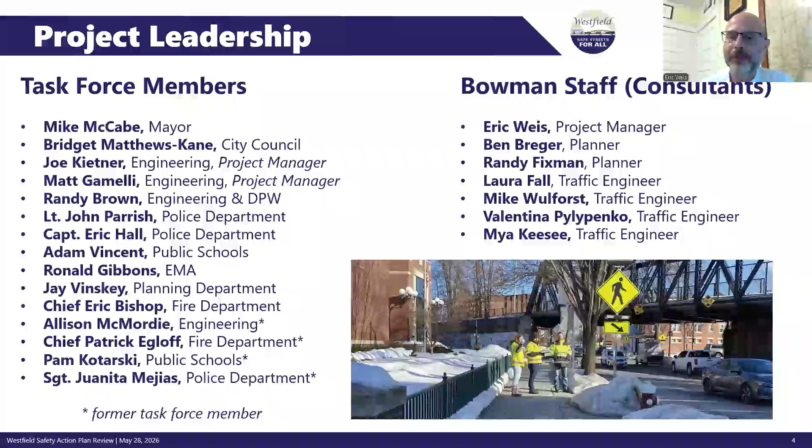And of course, we'd also like to thank everybody who's been involved with this project in any way since the beginning over a year ago, whether you chatted with us at an event where we were tabling, or you took a survey, or you sent in some questions by email. All of those contributions help to inform the development of this plan. So thank you very much. Next, please.

This project was funded by the United States Department of Transportation through a program called Safe Streets and Roads for All. We shorten it to Safe Streets for All. The intent of the Safe Streets for All program is to give municipalities and regional agencies the tools they need to reduce and ultimately eliminate serious injuries and fatalities on our roadways. A couple of years ago, the City of Westfield applied for a grant to fund this project, and the city was successful, which is why we're all here today.

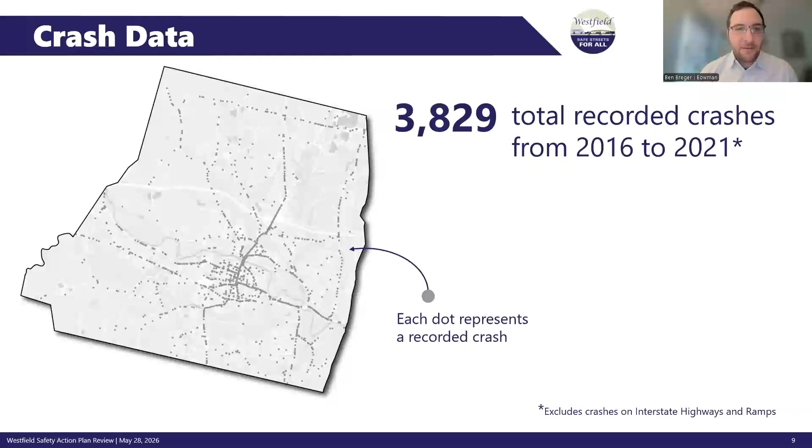So there were 3,829 crashes during that 6-year window, and you can see them spatially on the map here. If you go to the next slide. So we looked at crashes as they relate to crash volumes, crash severity, and then I want to highlight 2 acronyms that you'll see throughout here: fatal and serious injury crashes, FSI crashes. And we looked at crash trends by month and year, and then we looked at vulnerable road user crashes.

Vulnerable road users are folks walking or cycling and are more susceptible to serious injury crashes. So that's why we focus on the FSI crashes and the VRU crashes. If you go to the next slide.

And then if you go to the next slide, we'll see the slice of crashes that resulted in a serious injury requiring hospitalization or a fatality. So in the 6-year window we looked at, 2.5% of crashes had a serious injury or fatality. So that amounted to 81 serious injury crashes and 13 fatal crashes.

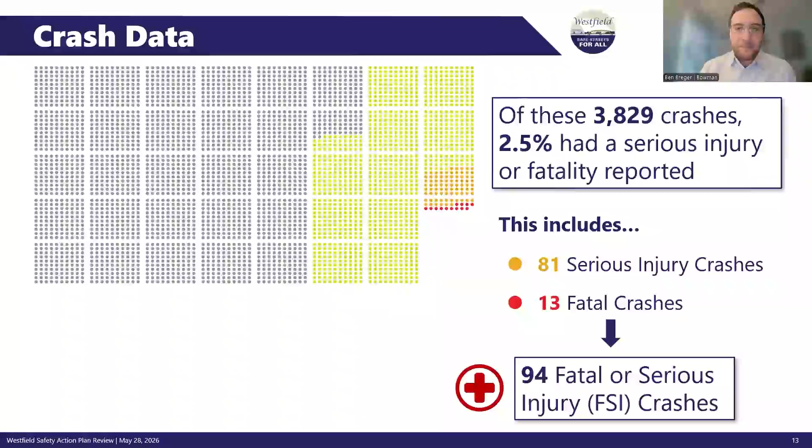And if you go to the next slide, so that's an average of 16 FSI crashes per year, or about 1 every 3 weeks. And the goal of this project, part of the Safe Streets for All project, is formulating a Vision Zero goal. So that's the goal of reducing and eventually eliminating all FSI crashes. So that's the overarching goal of the plan, which we'll touch on further.

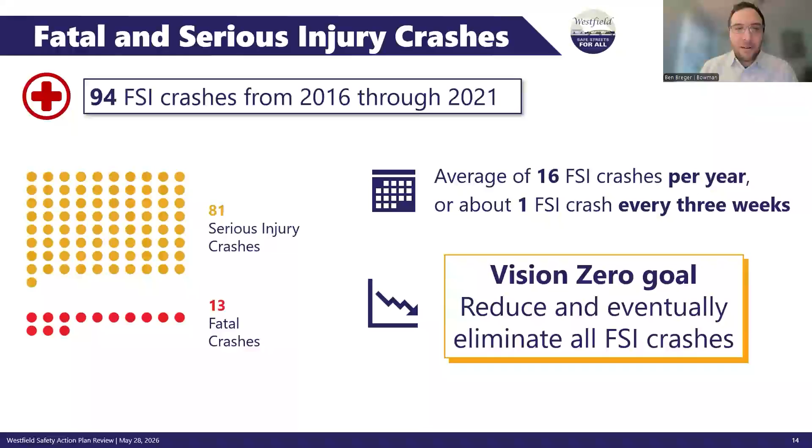So here you kind of see the trends. Throughout the 6-year window we looked at, they're relatively stable in terms of trends. Unfortunately, a few fatal injury crashes per year and 14, 10, 15 or so serious injury crashes per year. Go to the next slide.

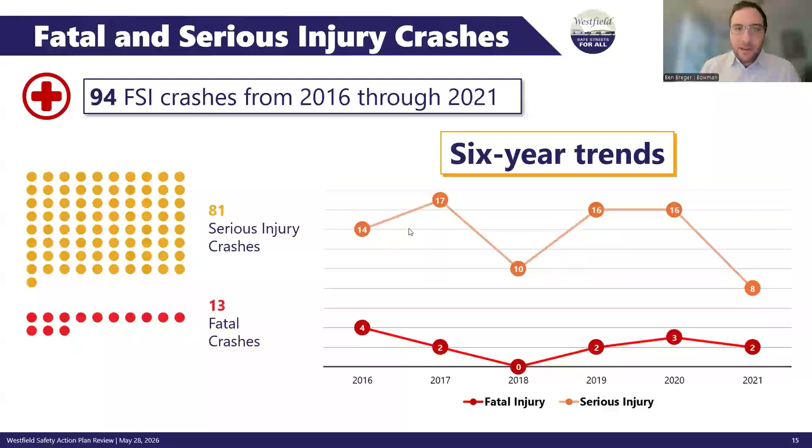So now we're just going to look at some of the results spatially through the city. So this heat map is showing all 3,829 crashes. The yellow and reddish yellow areas are where the hot spots are, and the light red and blue areas are where it's more sparse. So it's probably not surprising. The spatial distribution focused on downtown and the main corridors in Westfield along Route 20 and Route 10 and in the downtown area.

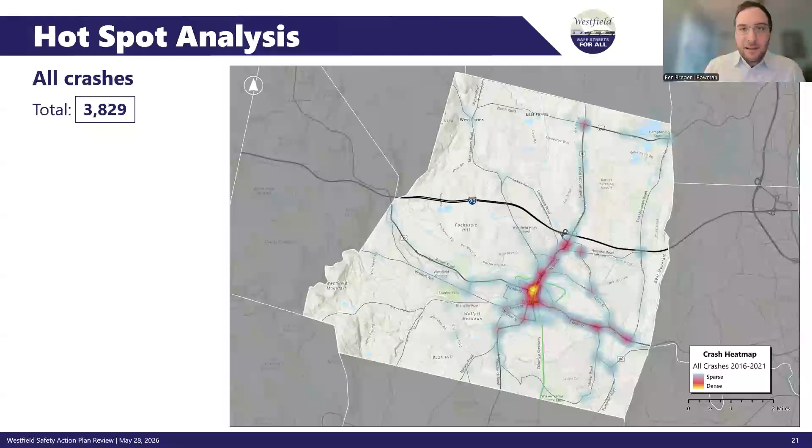So then the next slide shows the fatal and serious injury crashes, so these are a bit more scattered throughout the city. There's also fewer of them, so I think just one or two crashes would result in a dot or splotch there. But you still see the spatial distribution downtown and along Route 20 and in those areas.

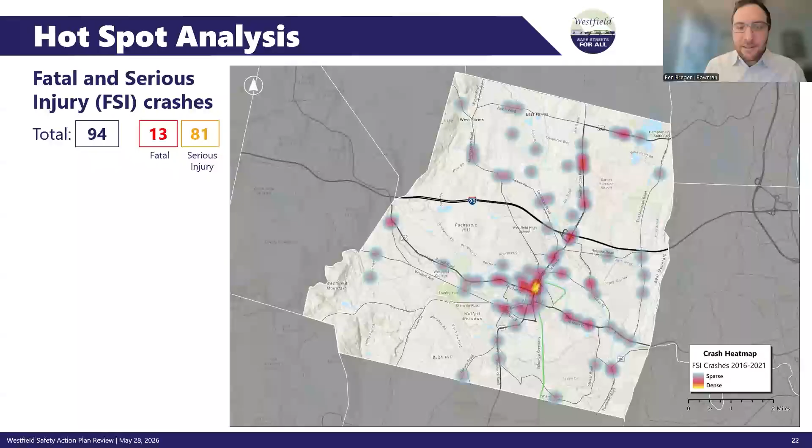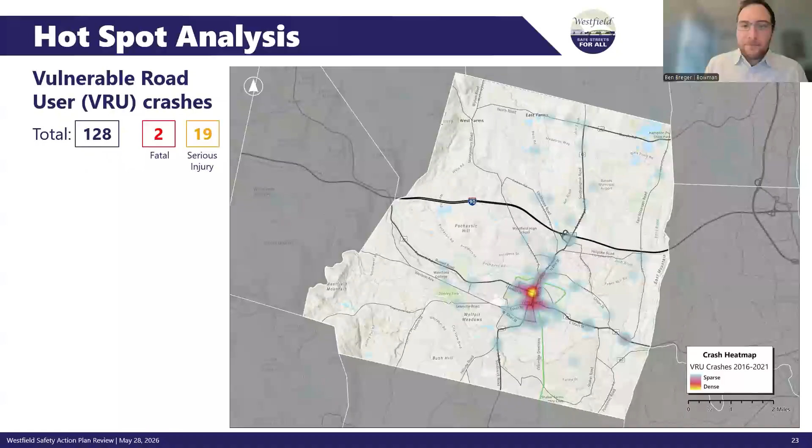Great. All right, so now I'm going to pass on to Eric to talk about public engagement and the efforts we've done. Terrific. Thank you, Ben, for that summary. And Joe, if we can go to the next slide.

So this part of our presentation is all about the public engagement that was carried out as part of this project over the last 12 or 13 months. The data analysis that Ben just walked us through gives us a really good start on where we should focus our attention. But public engagement, which is talking with people at events and at meetings and having conversations with stakeholders and conversations with our task force members, this has been really critical for informing where we're going to make recommendations and what's the nature of those recommendations.

So, for instance, we see 3 events where we tabled in 2025, the Mayor's Bike Ride, Westfield 5K, and at the Senior Center for, I believe it was called Senior Options Day. Next, please. And we had 2 evenings of an open house about the project at the Athenaeum last August. Talked with a lot of folks and gathered a lot of feedback.

Next, please. So here's a couple examples of exercises that people could participate in to help tell us, the team, what their concerns are. So on the right, you see a map. We asked people to jot down their concerns, color-coded by topic on different Post-its, and then pin them to the map for the location they're talking about. That photo on the left is asking folks to indicate what sort of strategies they prefer for public safety.

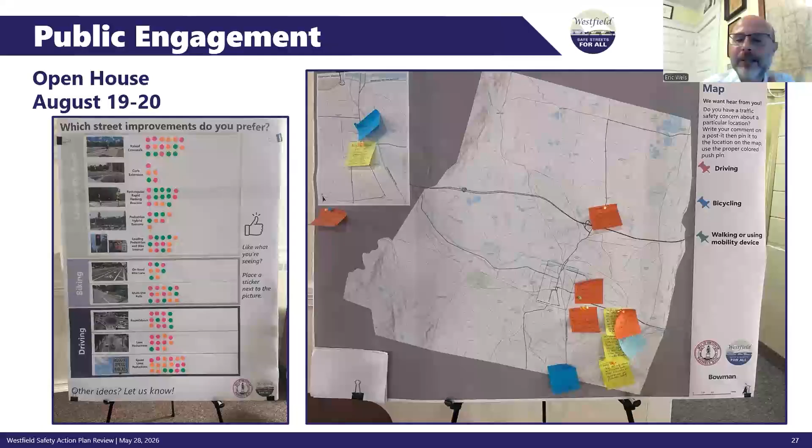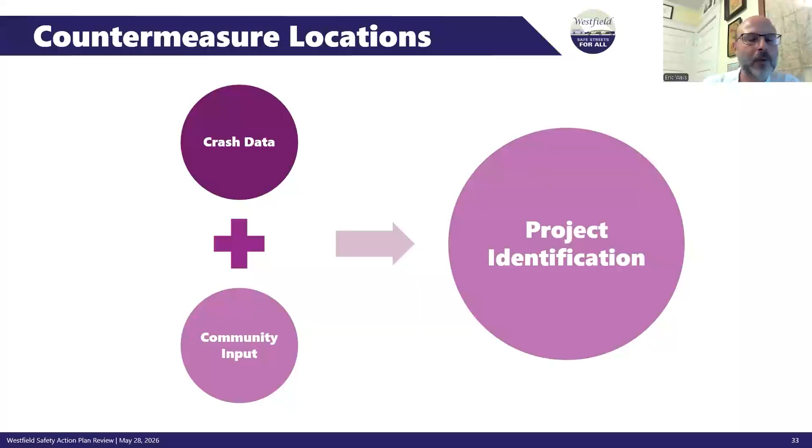So having completed the data analysis that Ben talked about, and having analyzed all of the public engagement information that we got, we were then able to combine the two to move into the next and probably most exciting piece of the project, which is project identification. And for that, Ben will walk us through the next slides. All right, awesome. Thanks, Eric. So yeah, if you go to the next slide, I'll start.

I'm going to start at a higher level, kind of like the citywide top safety issues, and then narrow into the more specific projects and concept plans. So one of our first exercises was basically take the trove of public feedback we got from community members and residents and the crash data that we looked at and kind of begin to synthesize what are the top safety issues that Westfield is dealing with.

And some of these are unique to Westfield, some of these are just kind of common safety issues across communities, but I think these ones are rooted in the feedback we received and what the crash data was telling us. So basically we did this exercise to categorize each of the public comments, applying different tags to them, and then found what categories or emphasis areas, what kind of buckets they fit into. And we developed these four safety issues.

So the top one would be excessive vehicle speeding. The second one is unsafe and low visibility pedestrian crossings. Third is driver confusion and intersection geometry. So basically, confusion around how you're supposed to navigate certain intersections, such as the roundabout downtown in Park Square, and then sidewalk, ADA, and bicycle network gaps.

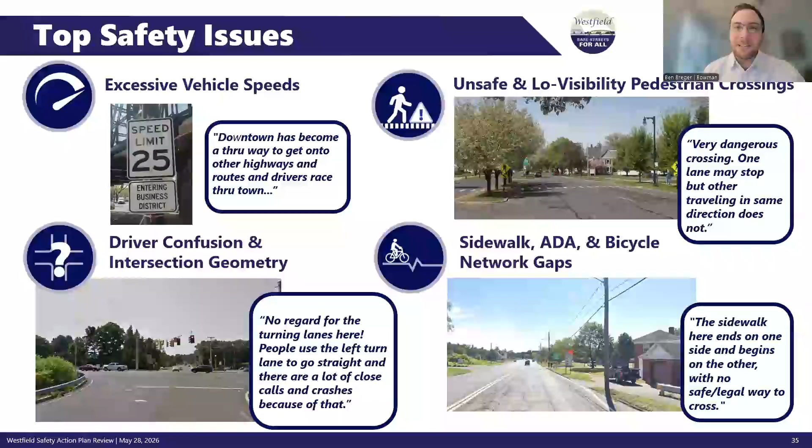And so if you go to the next slide, we provide just a snapshot of the citywide actions, because I didn't want to lay out every single one as it's written in the plan. But essentially for each top safety issue, we developed with the city some aspirational goals, just some principles to look into. So for excessive vehicle speeds, using street design to slow traffic and promote safer speeds, reinforcing speed limits through design, education, and enforcement, and then focusing on schools, walking routes, and high crash areas. So that would be examples of citywide actions for vehicle speeds.

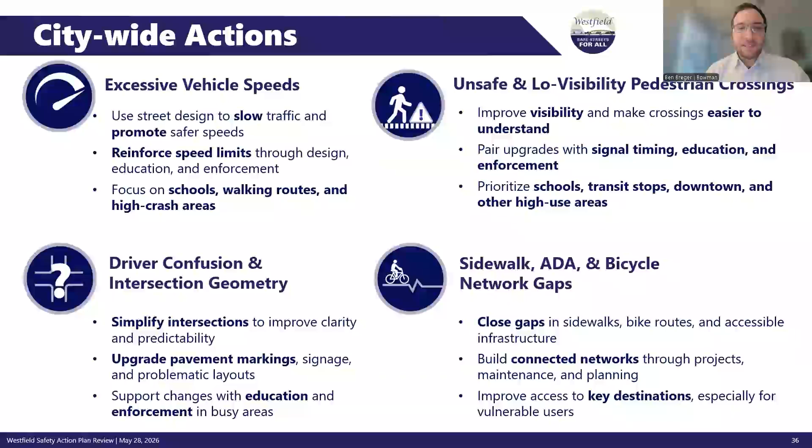For low visibility and unsafe pedestrian crossings, just improving visibility and making crossings easier to understand. That could take the form of lighting improvements, or trimming vegetation around crosswalks, or restricting parking up against crosswalks, which is often an issue, just to make people more visible, or doing crosswalk bump outs, raised crosswalks, those types of things. And so, yeah, for each top safety issue, we developed a list of citywide actions that the city can focus on as they're repaving roads or going through design and engineering processes. If you go to the next slide, Joe.

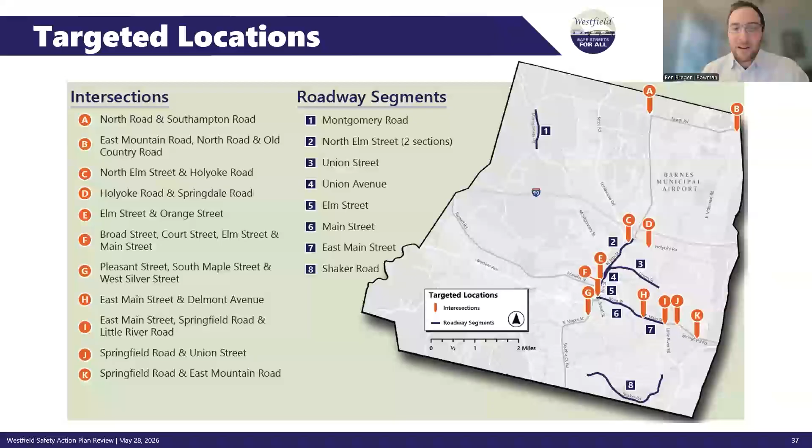So that covers the citywide actions, but then working again with the crash data and the input we heard from community members, we identified the top 20 locations in the city, and this is a mix of intersections and roadway segments. You might count that there's only 19 on the map here, but there are two sections of North Elm Street that we looked at. And so you'll see again, as we mentioned in the crash data, it's focused in the downtown area, but also along East Main Street, North Elm Street. And then we also cover intersections and roadways in the northern part of the city, and also on Shaker Road, where we heard a lot of community feedback about issues on some of the curves. So we can go to the next slide.

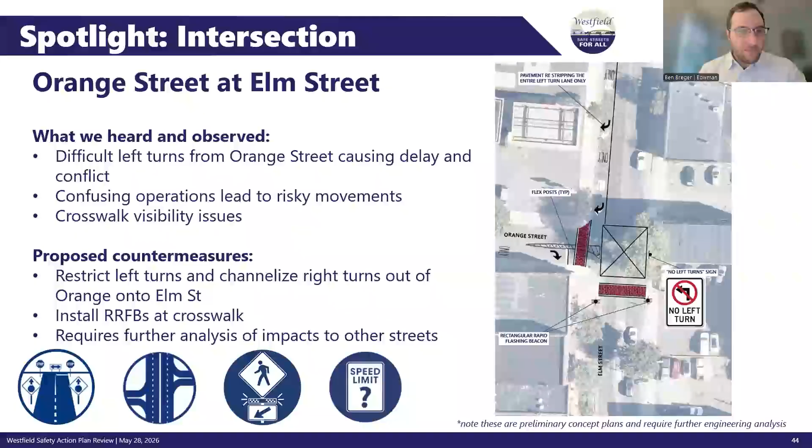So this idea, shown on the screen here on the right, would be to restrict left turns through the use of a flex post, for example, could be one idea. And so you force folks to take a right on Elm Street to go south. Because if you take away that left turn movement, it simplifies and reduces conflict points. And then adding the rectangular rapid flashing beacons to the crosswalk here. And so, yeah, that's the recommendation for Orange at Elm Street.

And then the next location is for North Elm Street, the northern segment of North Elm Street as you're headed up to Southampton. So the first location is at the intersection with Holyoke Road. We observed safety concerns and heard safety concerns at the crosswalk here, because cars are going very fast, and they almost treat this like an off-ramp to go onto Holyoke Road. So we are proposing to do a raised crosswalk, flashing beacons, yield signs, and just basically calling attention to this crosswalk here for this location.

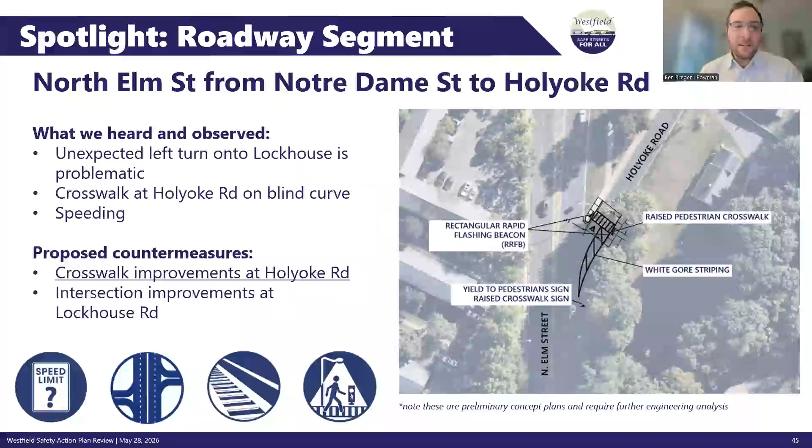And then the next segment, if you go to the next slide, is further south on North Elm Street at Lockhouse Road, where that left turn movement onto Lockhouse Road certainly causes congestion when cars are queuing there to turn left, but then also safety concerns, especially rear end crashes we saw a lot of in the data. We couldn't make a full left turn lane. However, adding the shared through and left pavement markings indicates to folks early on that there is a left turn, and that folks are going to be making left turns from that lane.

Adding an intersection control beacon that's overhead of the intersection with a yellow flashing light just to call attention to the intersection and the possibility of stopped cars in that location. And then, not that there are many left turns from Lockhouse onto North Elm Street, but making this a mountable right out only channelization would help reduce those conflicts as well.

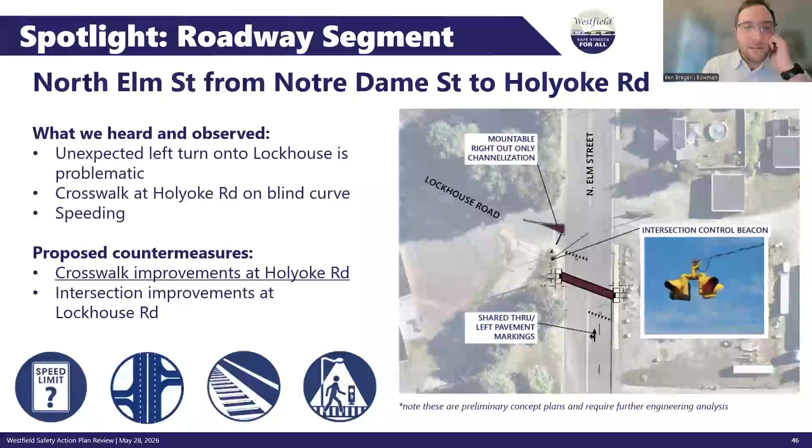So if you go to the next slide, Joe. So yeah, that kind of concludes our high level overview of the project identification. I'd encourage folks to look at the action plan in more detail for more information. So thank you, and I'll pass it on to Eric, who is going to go into our policy section.

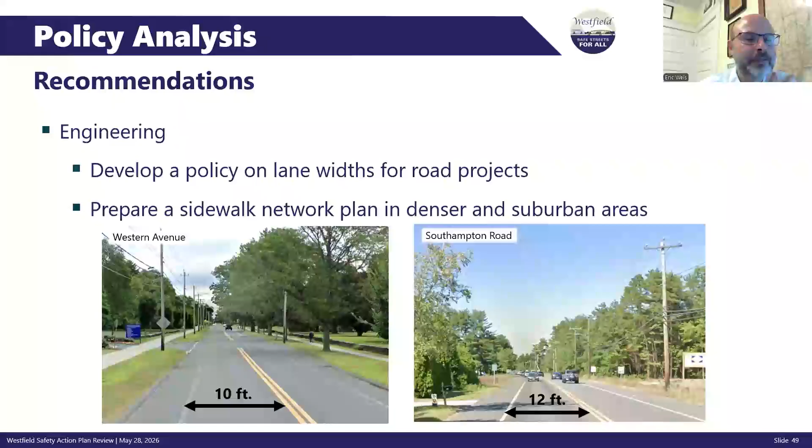We think it would be a good idea to incorporate such a review to see if it's appropriate to narrow lanes on certain streets. This brings speeds down, which results in a safer street. We're also recommending that a sidewalk network plan be created. Next, please.

Related to public safety, we are recommending that the police department take a closer look at the size of fines that are related to roadway safety. So for instance, if you're ticketed for parking on a sidewalk or in a crosswalk, the fine is something like $15 to $25. And that may not be much of a deterrent to stop people from parking on a sidewalk or on a crosswalk. So we're recommending that a review be done to see if it's time to raise those fines.

And as part of that, a progressive ticketing campaign could be enacted. What this means is it's a three-step process. The first step being education and outreach to city residents, letting them know that greater enforcement is going to start. Part two is starting with the tickets, but they're just warnings for a while, getting people used to it. And finally, the third step is actual issuing of fines.

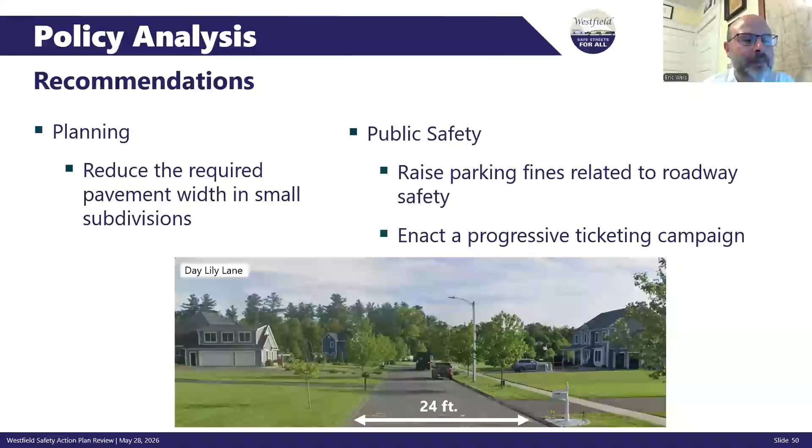So I did mention that there are a number of required elements to a completed safety action plan. And the reason it's important to have all these so we can call this a truly completed plan is that if it doesn't have all these elements, the city can't use the plan as the basis to go after certain types of federal funds to actually implement recommendations. But we're talking about bigger sums of money that can actually be used for construction.

So one of those elements is Vision Zero. It's a term that simply means having a goal to fully eliminate roadway fatalities and serious injuries by a certain date. It's a non-binding goal. I think that's very important to note. If the city doesn't reach its goal in time, it doesn't mean that anybody's on the hook for anything in particular, but it's a goal to work towards.

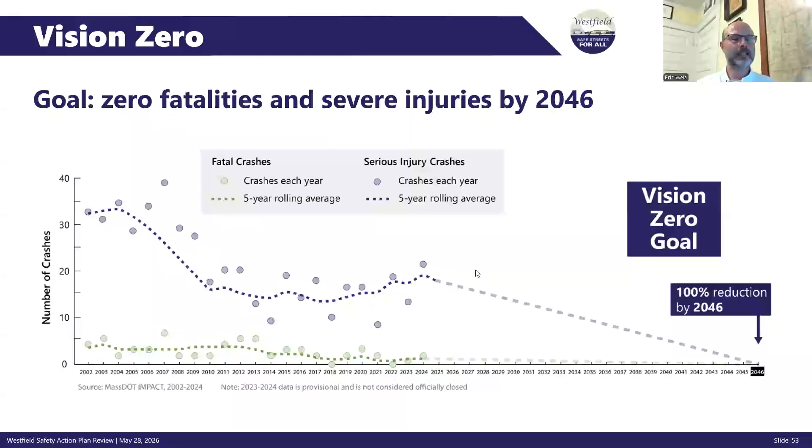So the last piece of a completed safety action plan is related to tracking progress and ensuring transparency in this process for the public. So on the next slide, you'll see we have 2 recommendations to address this requirement. The first is we recommend that a committee be tasked with staying on top of this effort, meeting periodically, whether that's every 6 months or maybe just annually, to track progress towards that Vision Zero goal. That committee could be an already existing one. It could, for instance, be the task force that came together for this plan. It doesn't require that an all-new committee be created.

And to cover the transparency piece, our recommendation is that the crash dashboard, which is already in place and can be seen through the same page on engineering's website that this plan is posted on, be maintained as a public resource, updated when new data comes in, and continue to be publicized as a resource for folks in Westfield so everybody can monitor progress towards that Vision Zero goal. And that is our very high level review of the safety action plan.

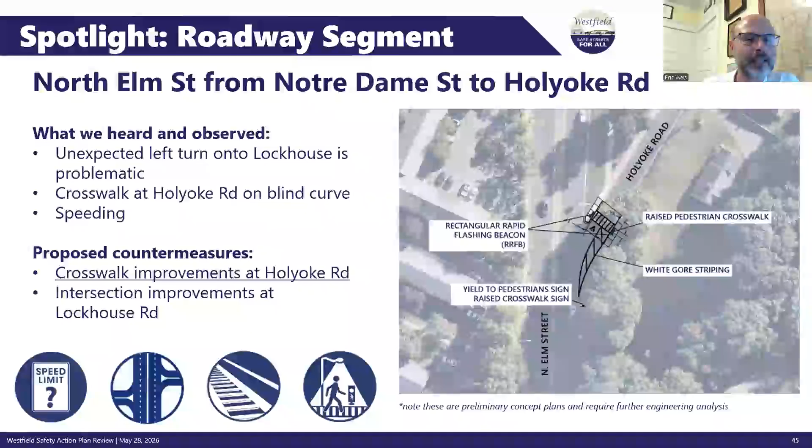There are a lot more than 20 intersections and roadway segments in the city of Westfield. So they may not be the top of the top, but they're still high priority. Everything on this list is a high priority. And we're going to recommend that the city share this with the regional MassDOT district so that they can be informed as MassDOT approaches roadway safety on its streets.

I want to also mention, because I don't know if we did, that this entire process of examining streets in Westfield omitted limited access highways, and in Westfield that means the Mass Pike and the on and off ramps for the Pike. Luke, I hope that answers your question.